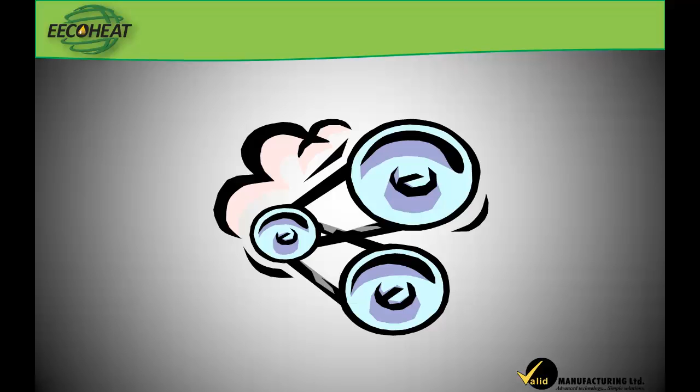It is widely accepted that a finely tuned, high-performance internal combustion engine can at best achieve a mechanical throughput efficiency of about 30%. This means that for every bit of energy consumed by an engine, less than a third of it will be converted into usable mechanical power. Some of the remaining energy is of course used up in the sheer effort required to run the engine and overcome the friction between the engine's various parts, but the vast majority of the remaining energy escapes right out the exhaust in the form of heat.

Unfortunately, we typically use the engine to create rotating mechanical power. If we could somehow harness the heat as well, then the available power from the engine is much greater than what is normally achieved. The Valid Manufacturing Engine Exhaust to Crude Oil Heat Exchange and Transfer System, or EECOHEAT, simply takes that waste heat and turns it into value.

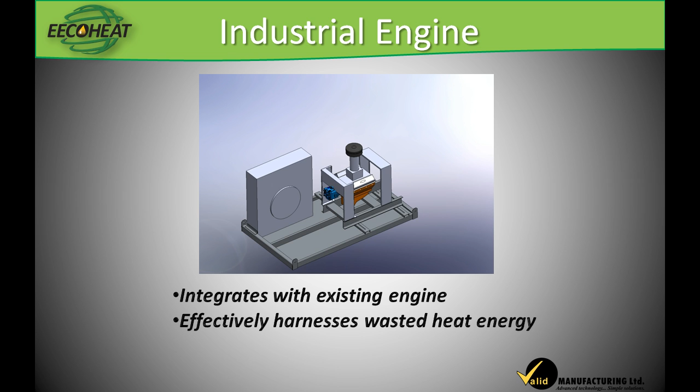Valid's EECOHEAT system has been designed to integrate seamlessly with your already proven industrial engine power plant. At the heart of this new product is the same engine that you have come to trust for its cost-effective longevity. Although the power plant remains unchanged, the Valid EECOHEAT product adds some new components and features to the exterior of the engine. This allows you to effectively harness heat energy which normally would have escaped into the atmosphere.

The first addition is a high-flow, high-efficiency stainless steel exhaust manifold system that enables the exhaust gases to flow out from the engine in an unrestricted manner. The manifold guides combustion heat out and away from the engine. The heavy-duty stainless steel exhaust tubing used for the manifolds and throughout the entire exhaust system is more than capable of handling the extreme temperatures that are produced by the engine.

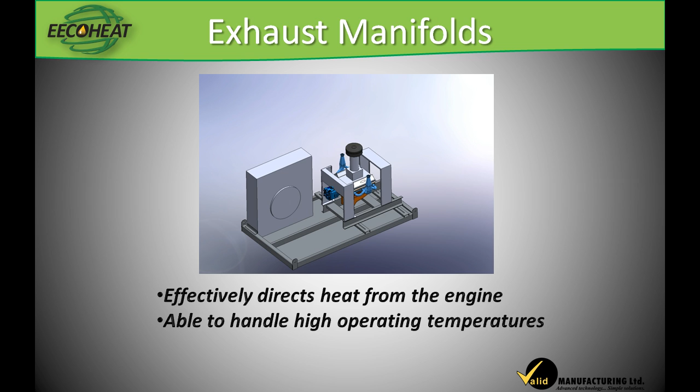The next addition is of major importance in making sure that there is never an interruption to the power-producing capabilities of the engine. Flow from the exhaust manifolds is combined and directed to a bypass diverter system that, if necessary, will allow the engine exhaust to be vented out to atmosphere just as it does on the standard engine. During normal operation, the bypass remains closed, directing engine exhaust into the EECOHEAT system. It will, however, automatically open to vent any excess heat being generated by the recovery system that is not required by the oil heating system.

The bypass line also opens if anomalies are found in any of the temperature or flow sensors incorporated in the system. The Valid EECOHEAT system automatically regulates the amount of heat reclaimed in order to adequately meet the requirements of the oil heating process.

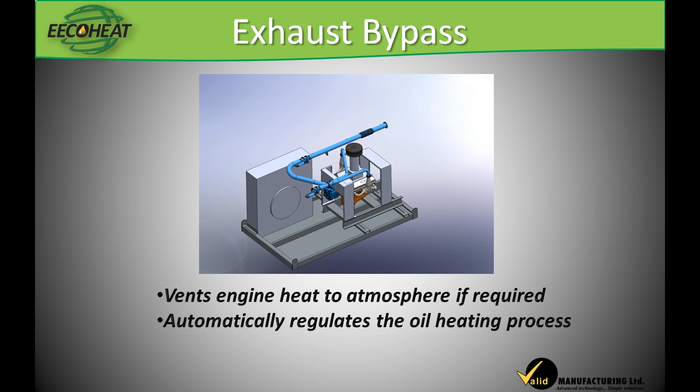The main component of the Valid EECOHEAT product is a high-efficiency stainless steel heat exchanger. This device takes exhaust gases in at temperatures in excess of 700 degrees Celsius and transfers that heat to a counterflowing high-efficiency thermal transfer fluid circuit that runs throughout the system. It is not uncommon to see a 600 degrees Celsius drop in temperature as the exhaust gases pass through the high-efficiency exchanger. The extremely efficient and robust design of this component is the key element of the EECOHEAT product.

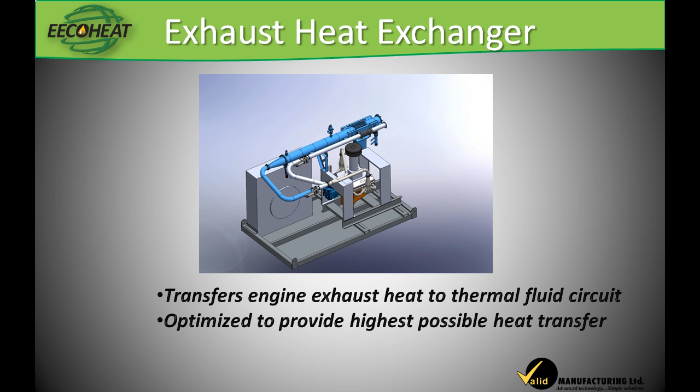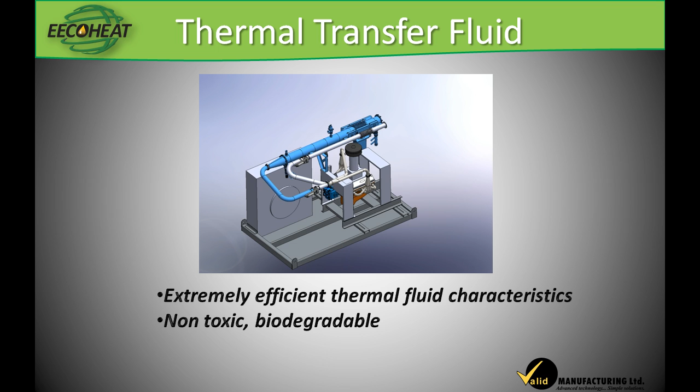The flow through the heat exchanger has been optimized through computer analysis to provide the highest possible amount of heat transfer while maintaining an unrestricted flow of exhaust gas. The thermal transfer fluid used in the Valid EECOHEAT product has extremely efficient thermal transfer characteristics and is completely non-toxic and biodegradable. Not only does it do an excellent job of ensuring that all available heat is transferred to the bitumen tank, but it also provides for a safe and environmentally friendly process.

In addition to heat reclaimed from the engine exhaust gases, heat from the engine's cooling jacket fluid is also scavenged in order to recover the maximum amount of heat possible. The engine glycol is circulated through a high-efficiency double-walled brazed plate heat exchanger, thereby transferring the engine heat into the high-efficiency thermal transfer fluid. Just as in the exhaust bypass system, the flow of engine coolant heat can either be directed through the brazed plate heat exchanger or allowed to simply circulate through the radiator in its standard fashion.

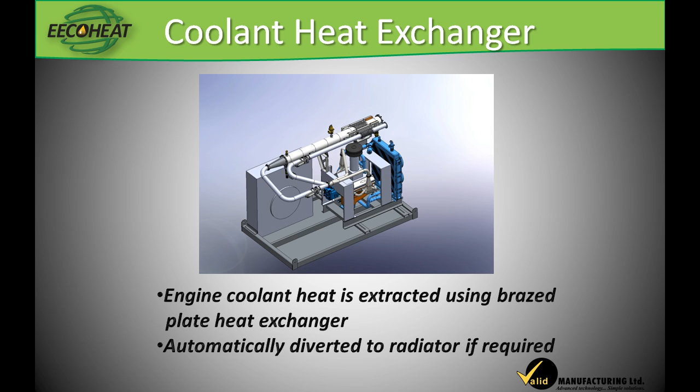The onboard control system determines when to include the engine coolant flow and when not to. As in other parts of the system, if any anomalies are found in the system's temperature or flow sensors, the engine coolant is immediately directed to flow through the radiator so that proper engine cooling is always maintained.

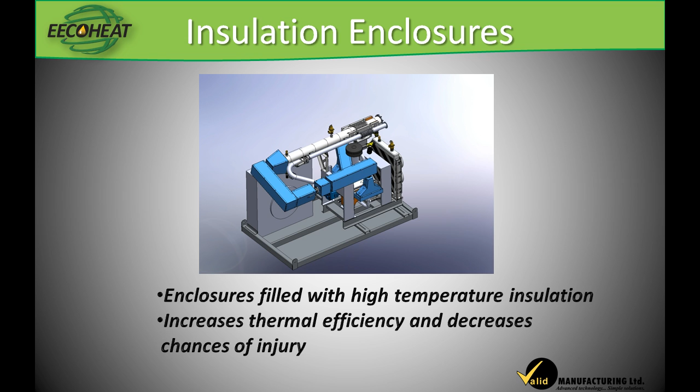In order to contain and manage the extreme heat of the engine exhaust gases, metal enclosures filled with high-temperature rated ceramic insulation are used to encapsulate the entire exhaust path leading right from the engine to the heat exchanger. In addition to making the system more thermally efficient, these enclosures also increase personnel safety and reduce heat-related injuries.

The exhaust gas outlet from the heat exchanger, as well as the outlet from the exhaust bypass line, are then both directed into an Atom Integrated Industries custom-engineered Class 6 stainless steel engine silencer. This silencer has been acoustically engineered to significantly reduce both high and low frequency sounds while still providing extremely low back pressure on the engine exhaust.

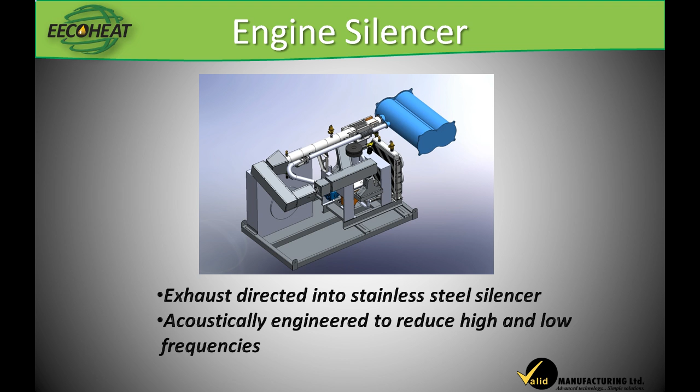The entire engine and heat reclamation system are then housed in a state-of-the-art Atom Integrated Industries sound attenuating enclosure. By insulating the entire exhaust tubing assembly and then placing the engine and its silencer within the overall sound-canceling enclosure, we are able to provide one of the quietest engine power plant installations available while reclaiming much of the valuable heat that would normally be wasted in the power generation process.

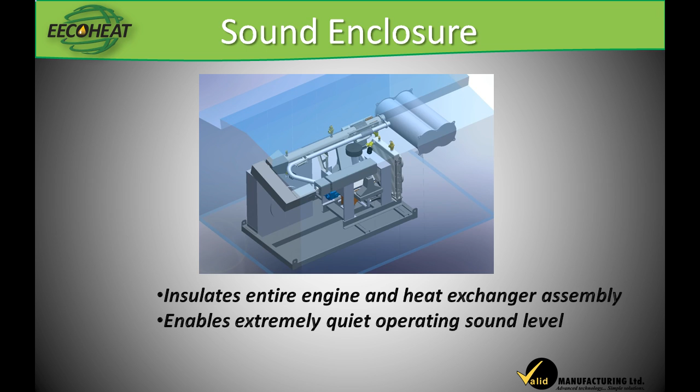Once the heat has been transferred into the thermal transfer fluid circuit, we need to transfer it again, this time into the bitumen tank. This is done by passing the heated fluid through a series of coils placed inside the storage tank. In order to support the heat coils, a fabricated steel structure is placed inside the tank. This structure, along with the heating coils, can be either provided as a complete assembly or in kit form designed for retrofit installation.

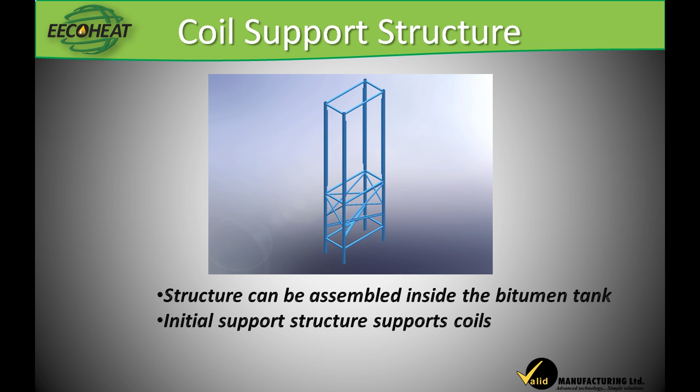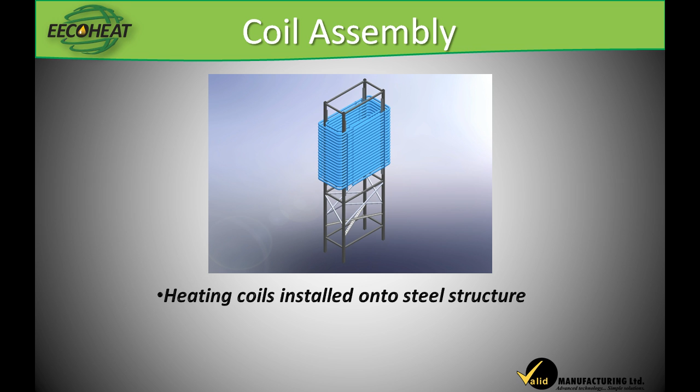The heating coils are installed in multiple concentric helical assemblies. The thermal fluid is pumped into the bottom of these assemblies and travels upwards through the spiraling coils, exiting at the top. This ensures that no air is trapped within the heating element coils. Tube extensions are attached to the inlet and outlet of the heating coil so that the thermal transfer fluid circulation connections can be made on the side of the storage tank.

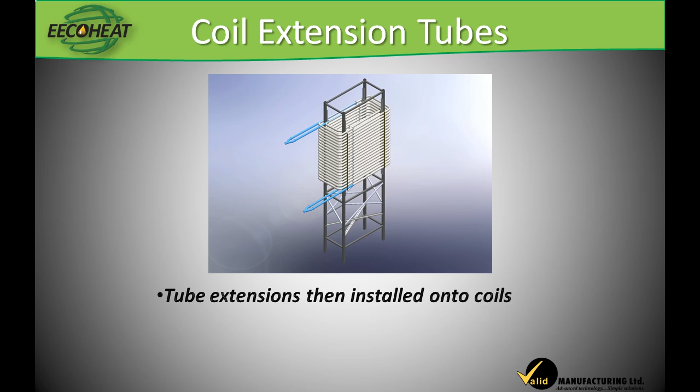The completed tank exchanger is fully contained within the storage tank. If desired, a standard burner tube can still be installed in order to provide supplemental heating during periods of extremely low ambient temperatures.

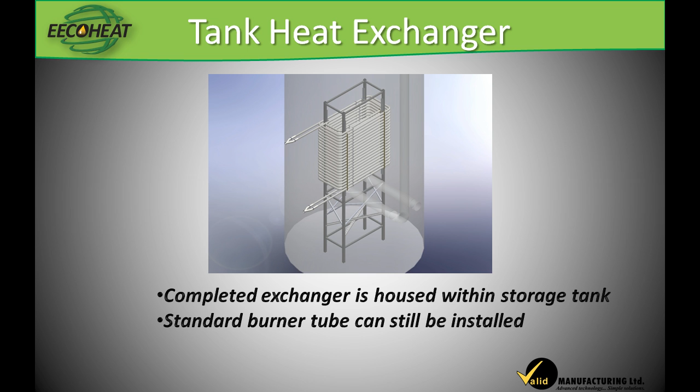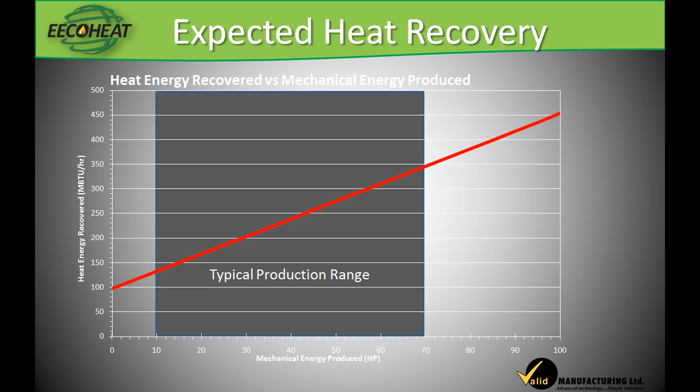Testing has shown that the amount of heat that is made available to the tank heating system is directly proportional to the amount of work being done by the engine. Every well is different, so the energy available from each one is also different. The following graphs indicate how much heat reclamation can be expected for a given well site based on the amount of mechanical or hydraulic work being done by the engine power plant. The values shown are all based on the power plant engine being a propane-fired 5.7-liter GM industrial engine.

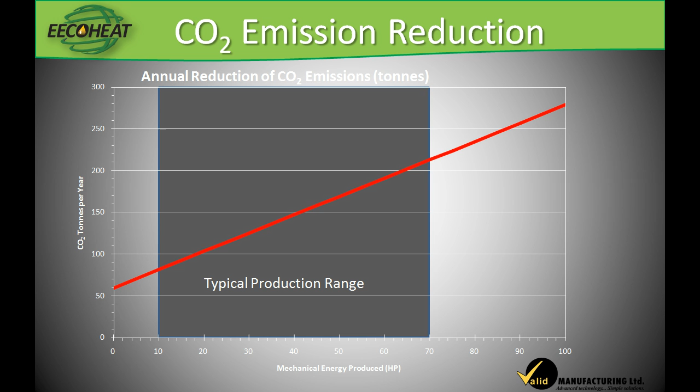By implementing the Valid EECOHEAT product, oil producers can expect to see reductions in their propane consumption at each well site by as much as 50%. In addition to the obvious and significant cost savings, it is anticipated that these same producers will also benefit from a net reduction in CO2 emissions of between 100 and 200 tons per well site per year.

With its optional data recording and analysis package, the Valid EECOHEAT product can provide historical and real-time data from the wellhead drive. All aspects of the system can be monitored, such as system temperatures and heat recovery levels. It can even determine the actual reduction of CO2 emissions at each well site by determining how much propane was not used to run the burner. Customers can choose to have full access to the data or just monthly summaries. If necessary, the EECOHEAT system can even send out text messages to inform your personnel of any service requirements that are necessary.

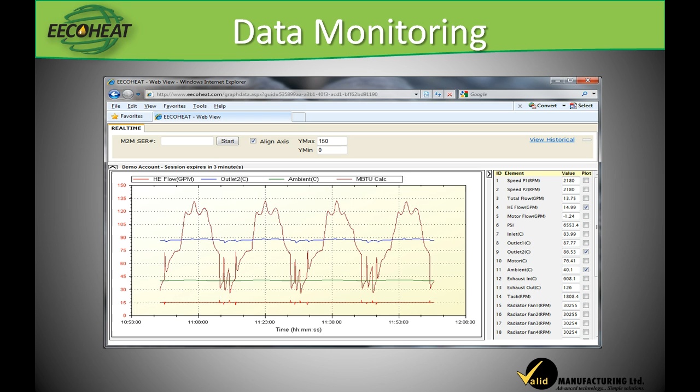As you can see from the preceding slides, the Valid EECOHEAT system recovers ordinarily wasted energy and reclaims a great deal of ordinarily wasted value. The EECOHEAT system is proven to increase the efficiency of your business, all while dramatically helping your bottom line.